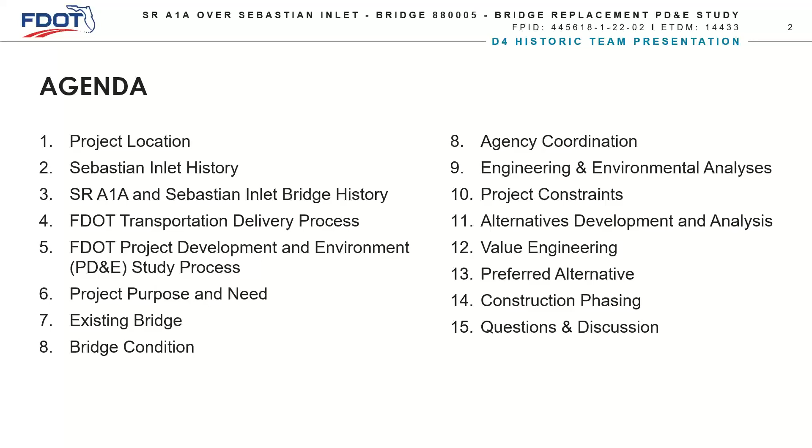Vinod covered the agenda items, so this slide just shows the agenda for today's presentation. Some of the information James and Vinod touched on, but I'll run through it anyway as part of the presentation. I'm sure some of this you already know, but as Vinod said, we're trying to cover the spectrum of the process of the project to get to where we are today.

The Sebastian Inlet Bridge, also known as the James H. Pruitt Memorial Bridge, is located at the Indian River and Brevard County boundary along State Road A1A. Part of the project is in District 4, who maintains and will be reconstructing the bridge, and it's also in District 5. So we've been coordinating with District 5 on this project as well.

The bridge crosses the inlet. It's surrounded by the Sebastian Inlet State Park to the east, or right on the map, is the Atlantic Ocean. To the west, or left, is the Indian River Lagoon.

Within the project limits, State Road A1A is a 2-lane facility with a shared use path located on the west side of the bridge, north of the bridge, shown by the green line on this location map. South of the bridge on the west side, it's a sidewalk shown by the green dash line. The blue line in between those two is the gap in bicycle and pedestrian facilities across the bridge, which does not exist at this time.

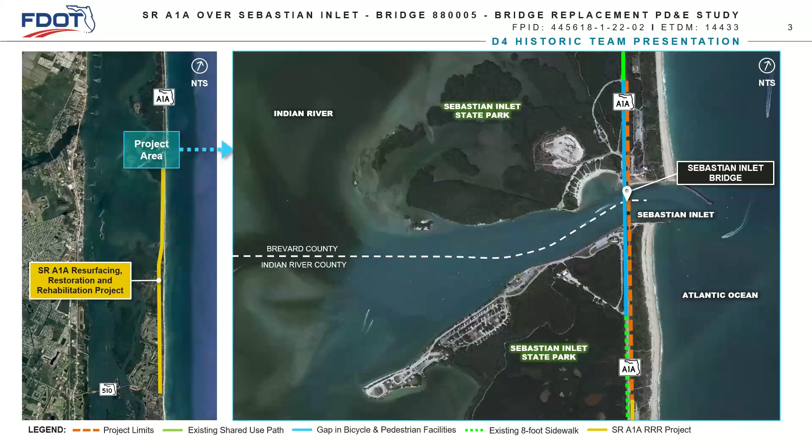So just to highlight some of the key features that surround the project: we have the bridge and the Sebastian Inlet, and the Sebastian Inlet State Park, which surrounds it on both the north and south sides. We have the Sebastian Inlet State Park Swimming Cove on the northwest quadrant, and an inlet grill and gifts facility with restrooms on the northeast quadrant. As James mentioned, there's the north and south jetties, the Sebastian Fishing Museum, the Sebastian Inlet State Park and Campground, the recreation area at Coconut Point, and a channel that goes from the Sebastian Inlet to the Intracoastal Waterway, which was coordinated with the Army Corps of Engineers and dredged by the Sebastian Inlet District, maintaining that connection between those two features. The Intracoastal Waterway is approximately 2 miles to the west of the Sebastian Inlet Bridge.

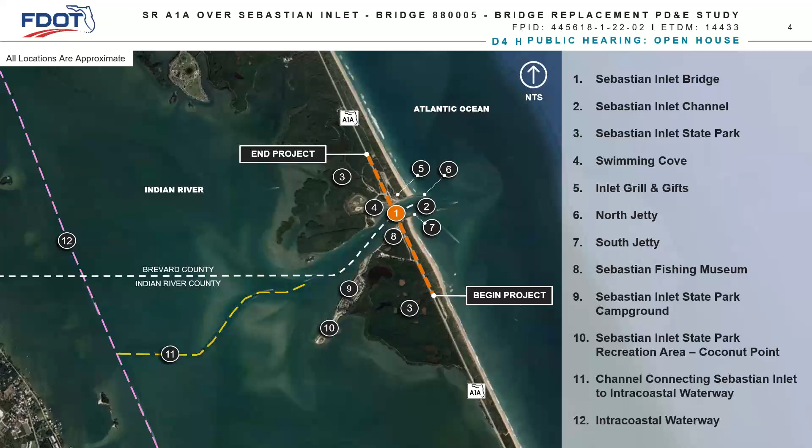The first settlers began to arrive in the Sebastian River area in the mid-1800s, and by all accounts, there were numerous attempts to cut an inlet in the barrier island located here between the Indian River Lagoon and the Atlantic Ocean. Shown on this slide, which is an 1880s geodetic survey, this area in the orange box is Gibson's Cut. D.P. Gibson was one of the first to attempt to create an inlet at this location, and it is the general location of the Sebastian Inlet today.

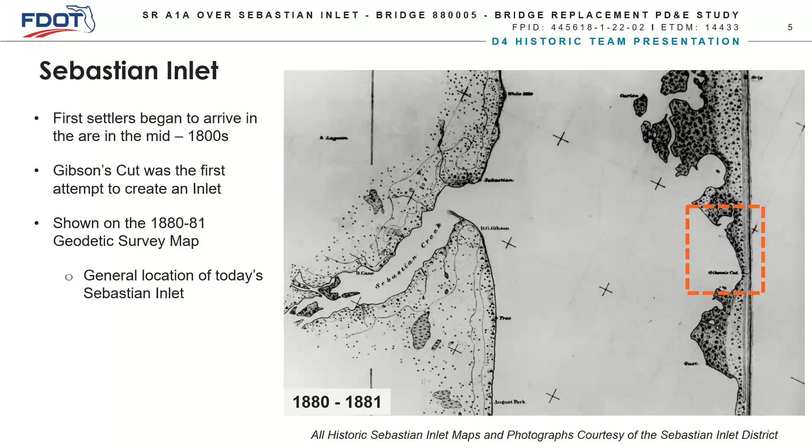At least 6 other substantiated attempts were made by 1905 to cut the inlet, and all were closed by sand, storm, or other natural causes as soon as they were opened. In 1905, Roy Couch, a figure whose name is synonymous with the Sebastian Inlet, arrived in Brevard County, and his arrival coincided with the 6th recorded attempt to open the inlet. Although it was successful, as reported in the Fort Pierce Tribune at that time, it wasn't long before the inlet was again filled with sand. As James mentioned, the Sebastian Inlet District was created in 1919 as a special taxing district to maintain navigation through the inlet. The inlet was then reopened again in 1923.

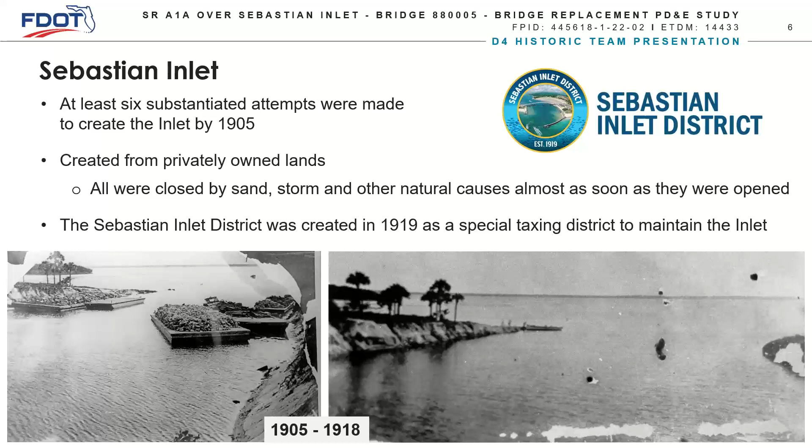In 1941, a northeaster came through the area and again closed the inlet. Because of World War II and for safety reasons, it was determined that the inlet should remain closed. Later during the war, the inlet was turned over to the U.S. Navy as an amphibious training ground for their demolition squads. You can see in these photographs the U.S. Navy training there, as well as the inlet and all the sand deposited in the shoaling area.

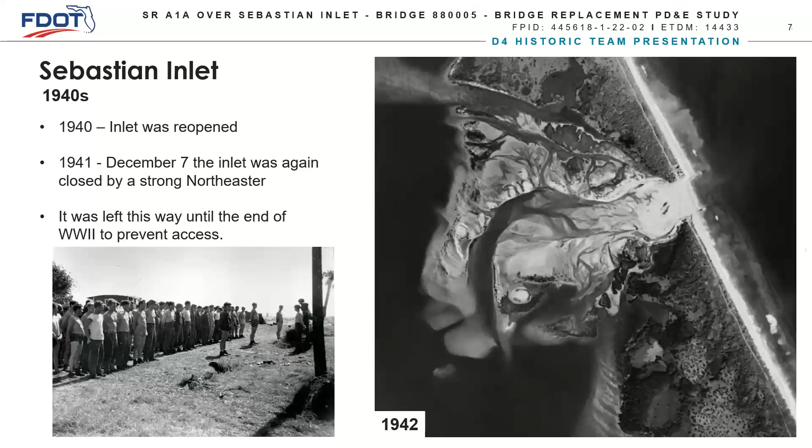So in 1944, you can see in the upper right photograph where the tower is, that's actually the center of the inlet, and it was enclosed with a 14-foot high sand dune. Then in 1948, U.S. Navy surplus demolitions were used to again open the inlet, and it has remained open ever since.

You can see there's an Army Corps of Engineers War Department bathymetric survey of the inlet, just to show some of the interesting graphic surveys that they did at that time. I just want to comment too that all of these photographs and maps were courtesy of the Sebastian Inlet District.

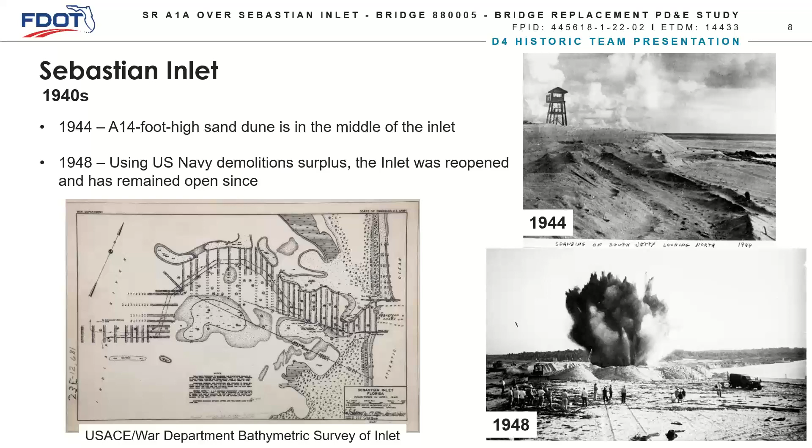And then moving on to State Road A1A itself. State Road A1A on the Brevard County side of the inlet was constructed between 1951 and 1956 by the Florida State Road Department. Then in Indian River County, the Florida State Road Department constructed the remaining portion of State Road A1A in 1961, prior to the completion of the Sebastian Inlet Bridge.

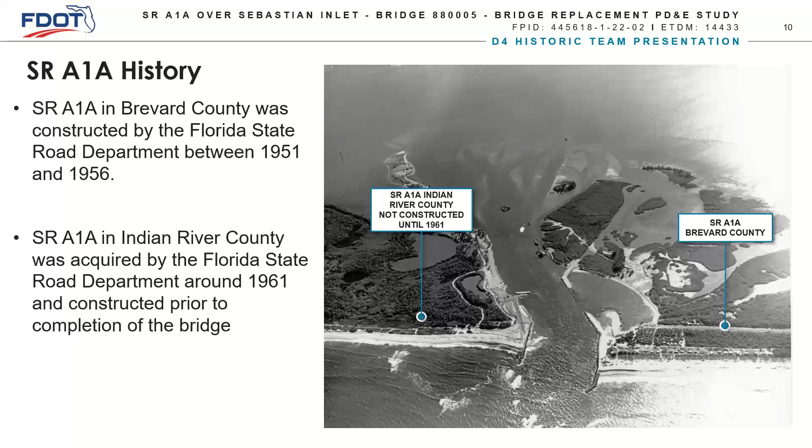The bridge, when it was completed, they specifically state that it will become part of State Road A1A for use by the general public, and that the Sebastian Inlet District shall never be obligated to pay for construction, replacement, repair, maintenance, or upkeep of the bridge.

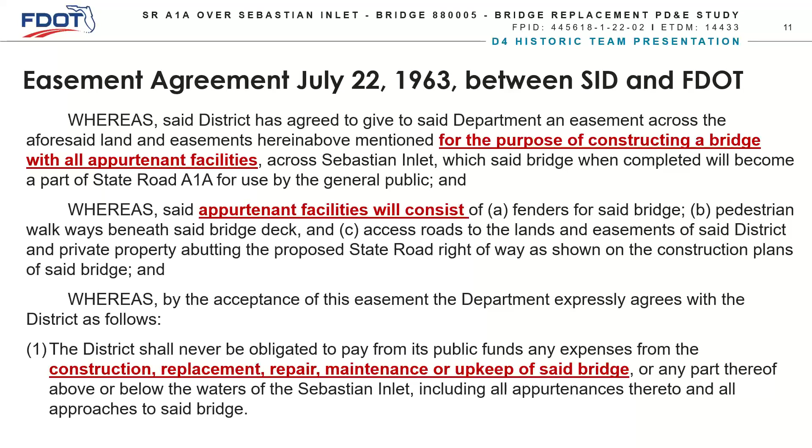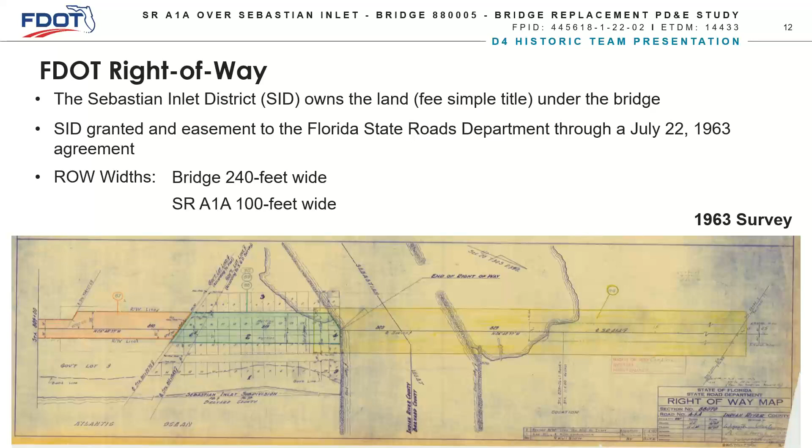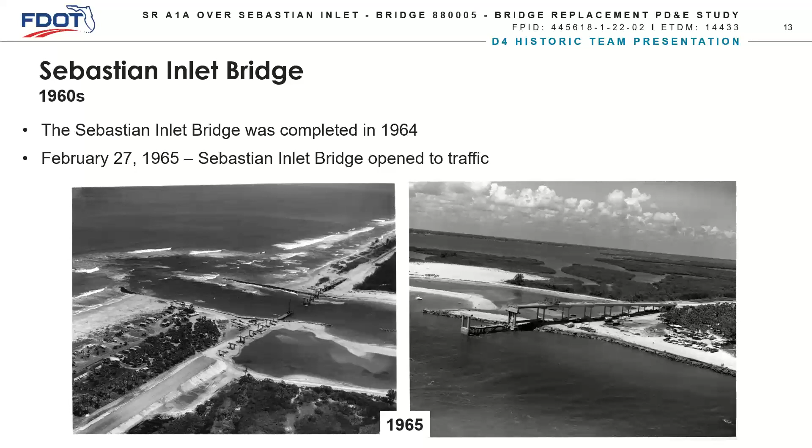So the Sebastian Inlet Bridge was completed in 1964 and dedicated in February of 1965. These photographs show on the left the bridge piers on the north side of the inlet, and then more construction of the bridge on the south side in the partially completed structure.

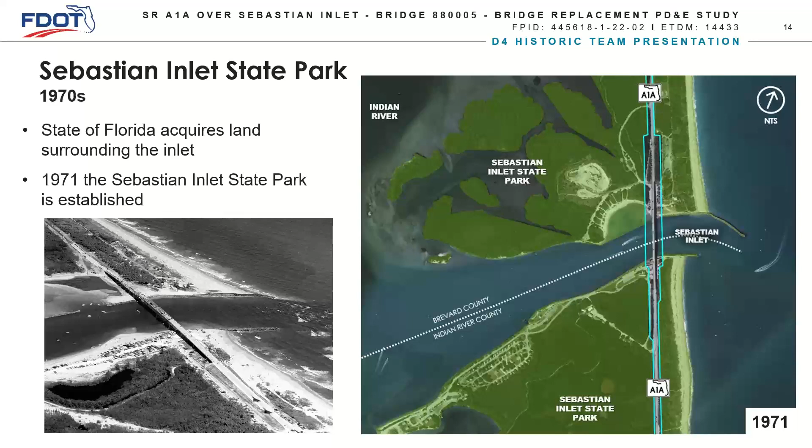So in 1971, the state of Florida began to acquire land around the inlet and establish the Sebastian Inlet State Park. Shown on the right is the state park area around the bridge location, and the park has now grown to 971 acres.

I also want to note that in 2016, the state of Florida Department of Transportation obtained NEPA assignment from the Federal Highway Administration. So essentially that grants all approving authority to the Office of Environmental Management for NEPA related decisions.

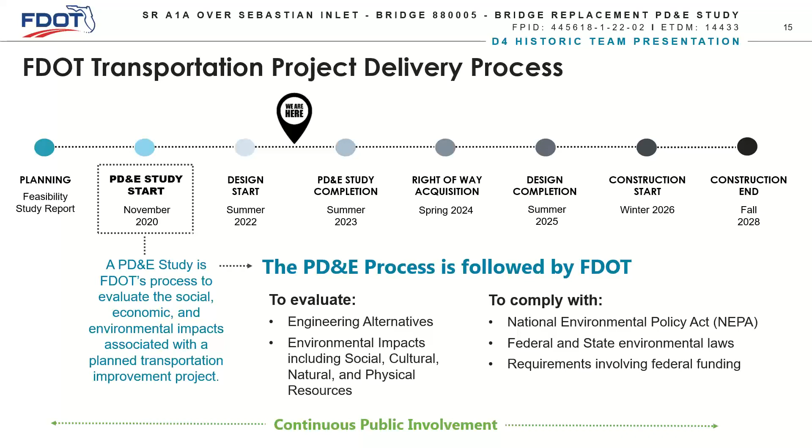So as part of the PD&E study process, it begins with data collection. The transportation issues and concerns are studied, and solutions and alternatives are developed. During the PD&E study, all environmental and engineering analyses are performed and documented regarding the proposed transportation improvement. The engineering analyses include the development of alternatives that meet the purpose and need for the project, and the environmental analysis determines what potential impacts the project might have on environmental resources.

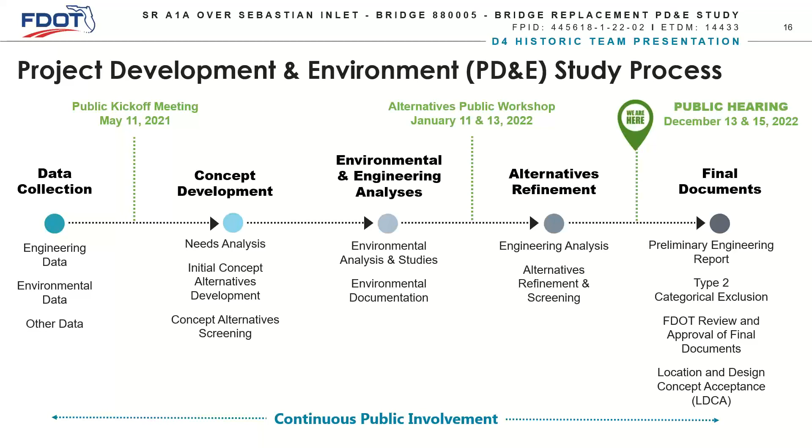These analyses all support the decision regarding the identification of a preferred alternative that moves forward into design. Public involvement is a big component of the PD&E process, and it's been ongoing throughout the PD&E study and will continue through design as well as construction.

So the purpose of this project is to address the bridge's structural and functional deficiencies, as well as address the gap in bicycle and pedestrian facilities, and evaluate alternatives. The need for the project is based on the November 2018 FDOT bridge inspection report that indicated a structural deficiency rating for the bridge and a bridge health index of 79.8.

The bridge is also functionally deficient or outdated in that it has minimal shoulders and no bicycle and pedestrian facilities.

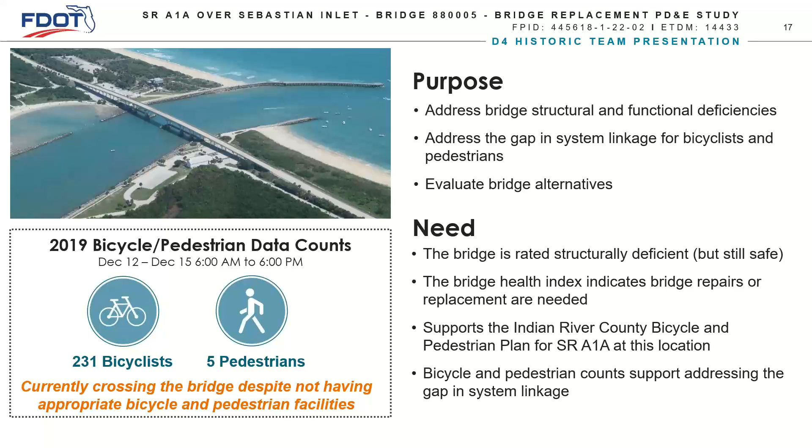The project does support the Indian River County Bicycle and Pedestrian Plan for State Road A1A. Interesting to note that as part of the feasibility study, the DOT did a bicycle and pedestrian count at the bridge over a 4-day period. 231 bicyclists crossed the bridge and 5 pedestrians. There are no bike-ped facilities across the bridge, so bicyclists actually share the road with vehicles, and some people attempt to walk across that little 2-foot shoulder. Even this past weekend, I saw someone carrying a bike walking on the little 2-foot raised curb on the bridge. So it's a much needed improvement for this project.

The existing bridge has a vertical clearance of 39 feet and a horizontal clearance of 150 feet, and the bridge roadway deck is 34 feet 3 inches. As shown in the photograph, you can see the observation and fishing piers, one located both on the north and south. A1A is a 2-lane facility with 2-foot wide shoulders and no bicycle and pedestrian facilities.

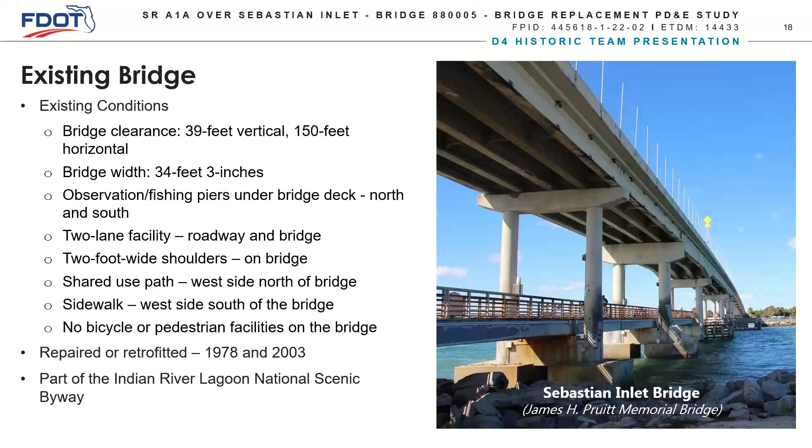The bridge has also been retrofitted or repaired in 1978 and 2003. State Road A1A is also part of the Indian River Lagoon National Scenic Byway, so the bridge is considered a historic resource.

It was originally designed as a post-tension structure. It was constructed as a pre-tension bridge, and it also features lightweight concrete. It has 19 spans, and the main span is 180 feet long, and the 3-span main unit has variable depth I-girders. These are some snippets from the original bridge plans shown here.

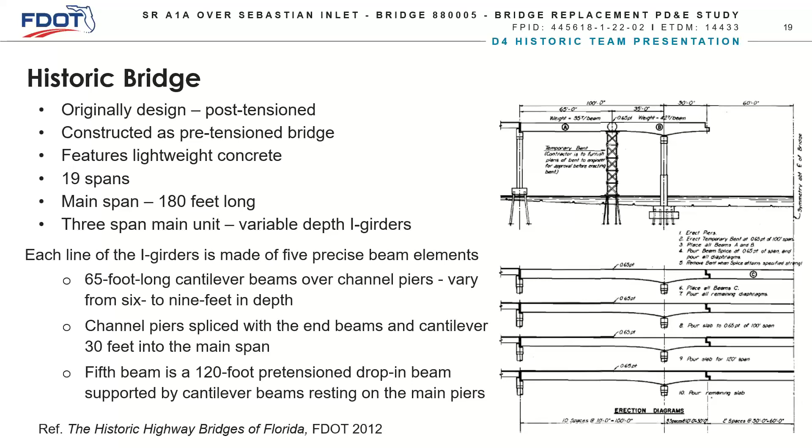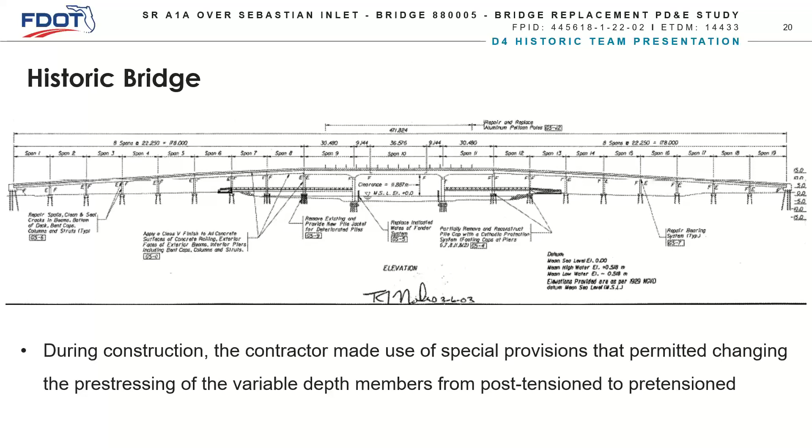During construction, the contractor made use of a special provision that permitted changing the pre-stressing of the variable depth members from the post-tension original design to pre-tension. Because of the type of bridge originally designed and then constructed, the bridge is a National Register of Historic Places resource under Criterion C, which is engineering, for its high integrity embodiment of a pre-stressed concrete bridge in Florida.

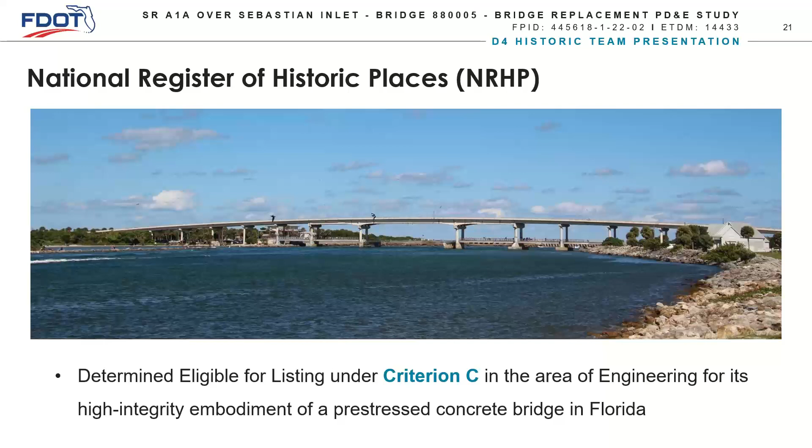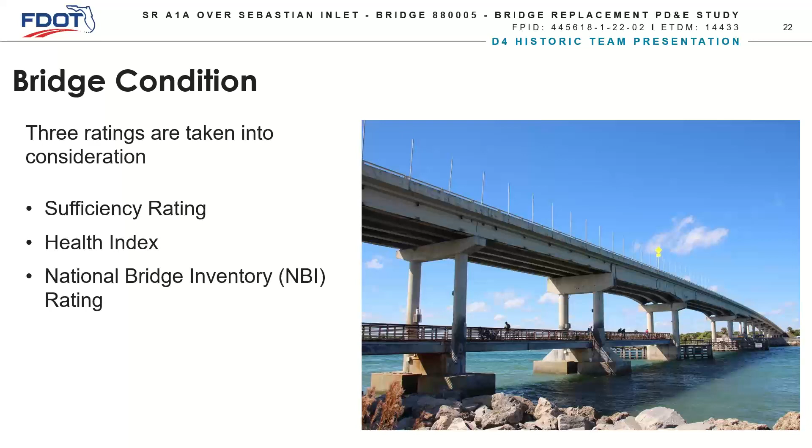As far as bridge condition, the Federal Highway Administration uses 3 ratings to determine it. The sufficiency rating evaluates factors indicating a bridge's sufficiency to remain in service, helping determine which bridges may need repair or replacement, not whether they're structurally sound. The Bridge Health Index measures 10 to 12 different elements; a lower health index means more work is required to bring the bridge to an ideal condition. A health index below 85 generally means the bridge needs some repair or replacement. The National Bridge Inventory gives ratings from 1 to 9; when any component is rated a 4, the bridge is considered structurally deficient. The November 2018 FDOT Bridge Inspection Report indicated a bridge sufficiency rating of 51.6.

The sufficiency rating serves as a prioritization tool for bridges for funding. It looks at 4 separate factors: structural adequacy and safety, serviceability and functional obsolescence, essentiality for public use, and special reductions. I want to comment on essentiality for public use for this location, because State Road A1A is the only north-south roadway here, and you'll see later that the detour is significant. The essentiality for public use here is high.

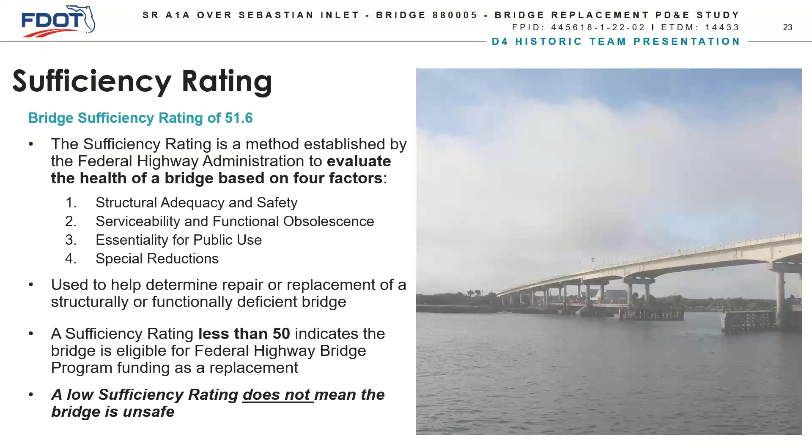A sufficiency rating less than 50 indicates the bridge is eligible for Federal Highway Bridge Program funding as a replacement. It does not mean the bridge is unsafe. The same bridge inspection report indicated a health index of 79.8, and that lower health index just means more work would be required to improve the bridge to an ideal condition. It may be more economical to replace than repair.

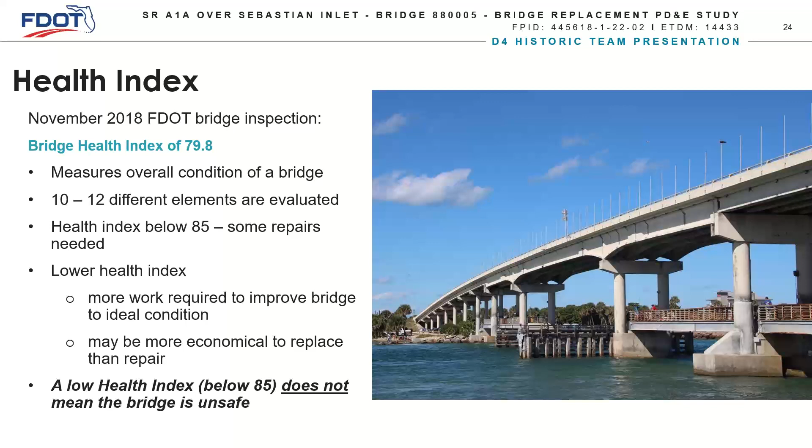The structural deficiencies identified in the bridge inspection report are based on the National Bridge Inventory Rating, which represents the primary structural components necessary to determine the overall safety of the structure. Those elements are the bridge deck, superstructure, substructure, and culvert condition if culverts are present.

A rating greater than or equal to 7 means the bridge is in good condition, 5 or 6 is fair, and less than or equal to 4 is poor condition, which gives the bridge that structurally deficient rating.

The term functionally deficient just means that the bridge does not meet current roadway design standards, such as lane width, shoulder width, and bicycle and pedestrian facilities.

FDOT's work program also requires that structurally deficient bridges, once identified, have corrective actions, which could be either repair or replacement, initiated within 6 years of that identification.

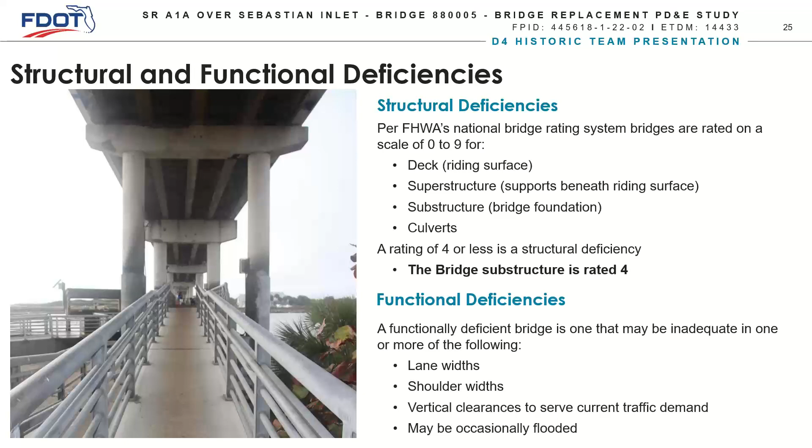So both the structurally deficient rating, the low health index, and the low sufficiency rating do not mean the bridge is unsafe, all 3 of those.

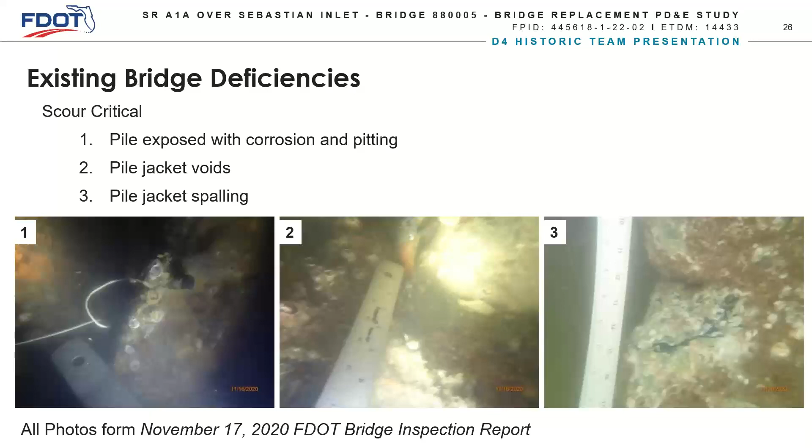These photographs were taken from the bridge inspection report to give an idea of conditions. This is below the water surface. The bridge has been identified as scour critical, and you can see exposed pile jackets, spalling, corrosion, and pitting.

There's also delamination and spalling occurring on the bridge deck, as well as on the piers, showing the exposed steel that's present.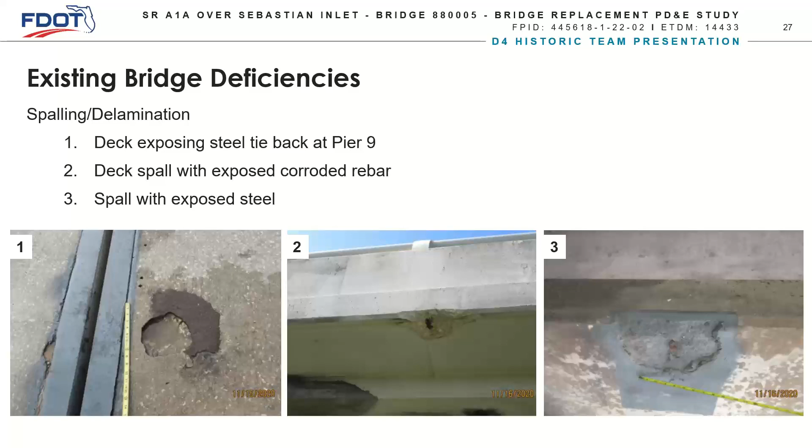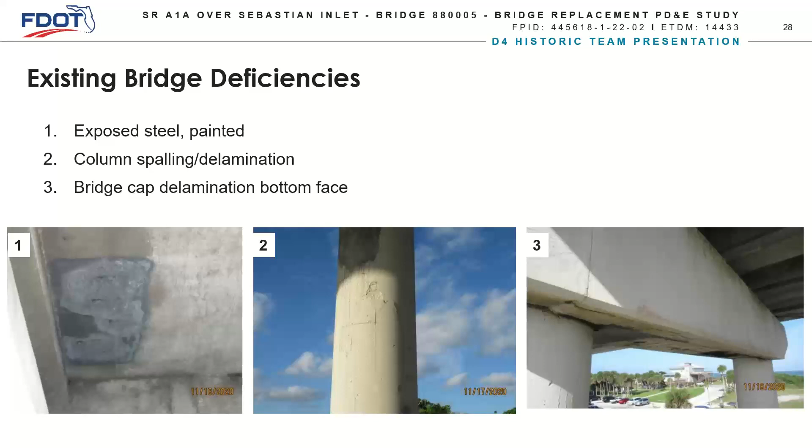Additional exposed steel, there are painted areas—that's a recurring thing where some of the concrete just drops out, so they repair that. There's also column spalling and delamination, and bridge cap delamination.

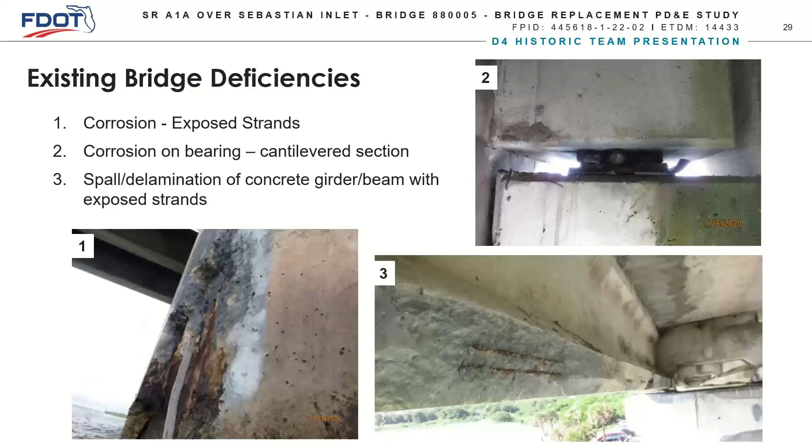These are some additional photographs showing corrosion on exposed strands, as well as on the cantilevered section, and then on the beams and girders as well.

This is a picture of the under-bridge fishing pier showing corrosion on the pier deck, as well as the railing.

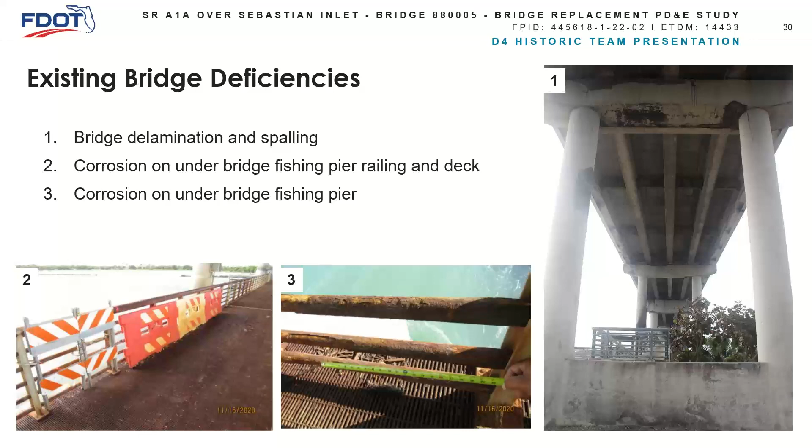Due to the location of the bridge, surrounded by the Sebastian Inlet State Park, there's been numerous agency coordination throughout the PD&E project with federal, state, and local stakeholders, as well as the general public for navigation, because it's a heavily used inlet for navigation and fishing.

This shows the timeline of U.S. Coast Guard coordination. The Coast Guard is the agency that determines vertical and horizontal clearances for bridges. Along the intracoastal waterway, the minimum vertical clearance is generally 65 feet, and the horizontal clearance is 125 feet. Keep in mind the Sebastian Inlet is not located on the Intracoastal Waterway, but 2 miles to the east of it.

During the feasibility study, a navigation study was completed—more of a visual inspection of the types of vessels using the inlet and a count of that. Then in April 2021, as part of the PD&E study, we completed a navigation survey in accordance with the U.S. Coast Guard's Navigation Impact Study Scope.

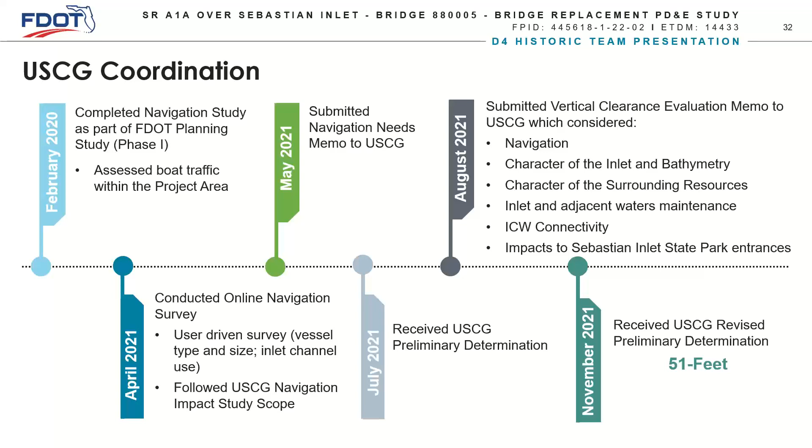This rendering shows a comparison of the existing bridge clearance at 39 feet and the proposed bridge clearance at 51 feet. The existing horizontal clearance is 150 feet, and it's planned to maintain that 150 feet horizontal clearance through the inlet. We didn't feel there was any need to reduce that width, because it takes some skill to navigate through there — the wider the inlet, the safer it is for navigating.

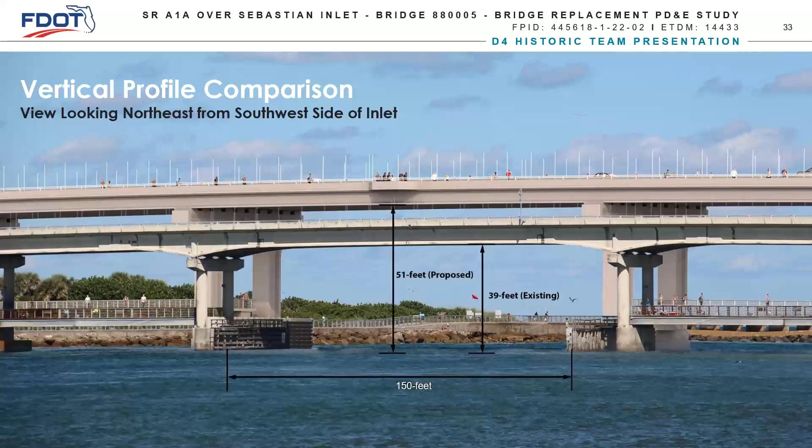This view is looking northeast from the southwest side of the inlet within the Sebastian Inlet State Park.

So for each build alternative, we looked at roadway and bridge design criteria. The design requirements included items such as bridge horizontal and vertical clearances, bridge and roadway alignment, bicycle and pedestrian facilities, maintenance of traffic during construction, safety, stormwater management, coastal influences, geotechnical characteristics, and utilities, as examples.

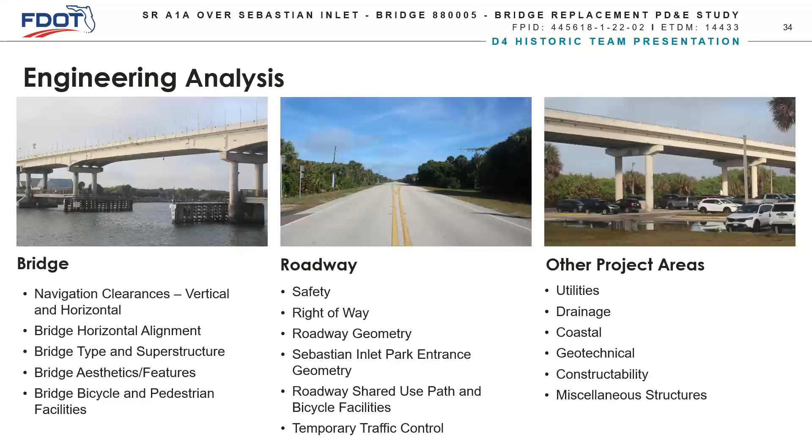The same is true for the environmental analysis for each build alternative. It was evaluated against being able to avoid or minimize impacts to these resources as we developed the alternatives, using criteria such as mobility, economy, community and recreational resources, historic and archaeological sites, wetlands, water quality and resources, wildlife and habitat, traffic noise, air quality, and contamination.

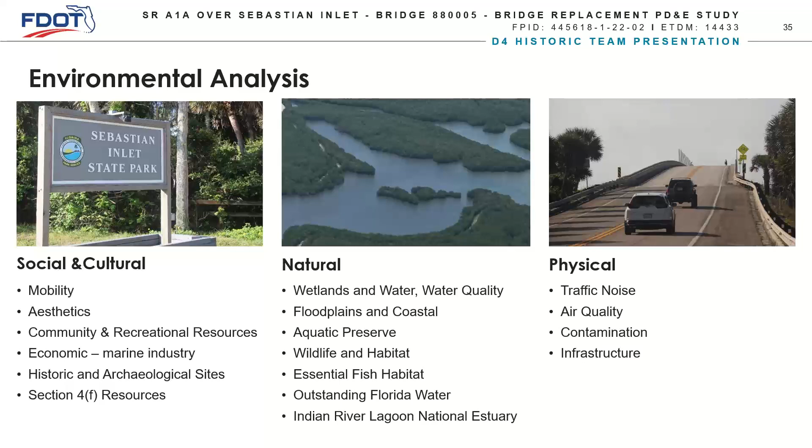Early on, prior to alternatives development, we looked at the project constraints and controlling criteria, which for this project were somewhat unique. South of the bridge, we have the existing right-of-way, which varies throughout this portion of the project area, and then we have the Sebastian Inlet and the Sebastian Inlet District fee-owned submerged lands.

We have the South Jetty access, and the Sebastian Inlet State Park dunes — these are high quality resources which really cannot be impacted at all — and the potential for beach mice habitat in this particular location. Then we have the Sebastian Inlet State Park South entrance, and the wetland areas and mangroves, which are abundant throughout the project area, especially on the west side.

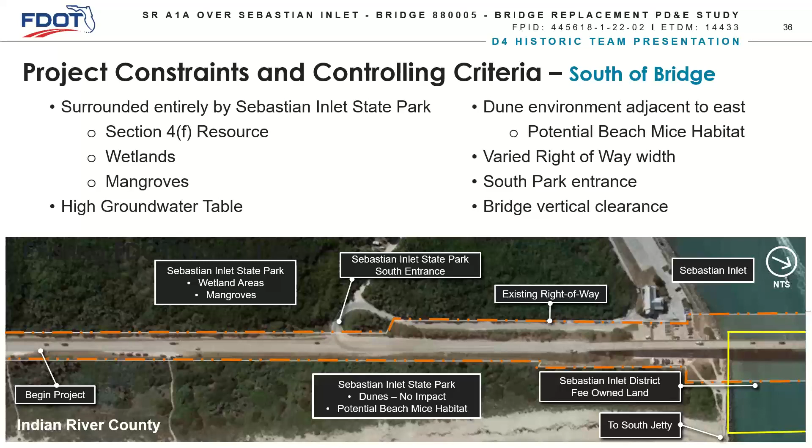We did the same for north of the bridge. We have the Sebastian Inlet State Park North entrance, the existing right-of-way, and the Sebastian Inlet State Park Swimming Cove. Again, the Sebastian Inlet District land and access to the North Jetty. We also have, on the east side, facilities for the park including restrooms, a restaurant, beach access, and utilities, and then the Sebastian Inlet District Access Road.

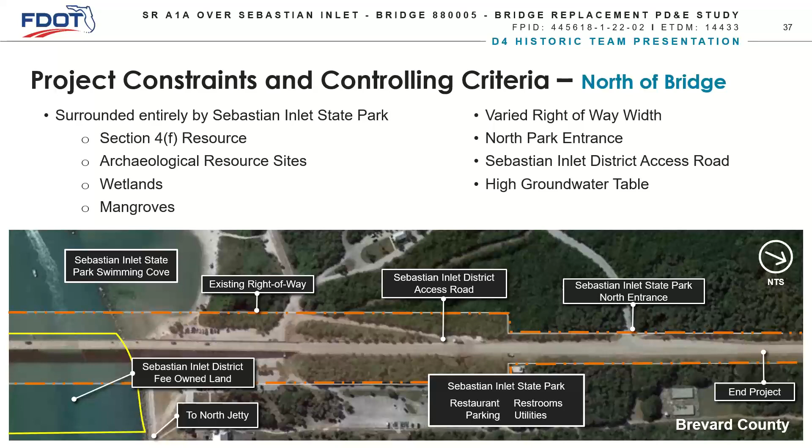That access road is what James had referred to — when they do beach renourishment, they stockpile sand in the northwest quadrant, a little to the west of the swimming cove, and they truck it down to the south side, using that access road to get onto A1A and haul it down to the south side.

Drainage solutions for older bridge replacement projects can be a significant challenge. Also note that the Indian River is an Outstanding Florida Water, which includes all the waters commingled with the mangroves adjacent to the Sebastian Inlet State Park, west of the project. The bridge discharges via scuppers to the inlet, shown in the green shaded area on this map. The bridge approach runoff is collected via inlets on both the east and west side of the road, discharging to the west, and the roadway portion discharges via sheet flow to low roadside ditches.

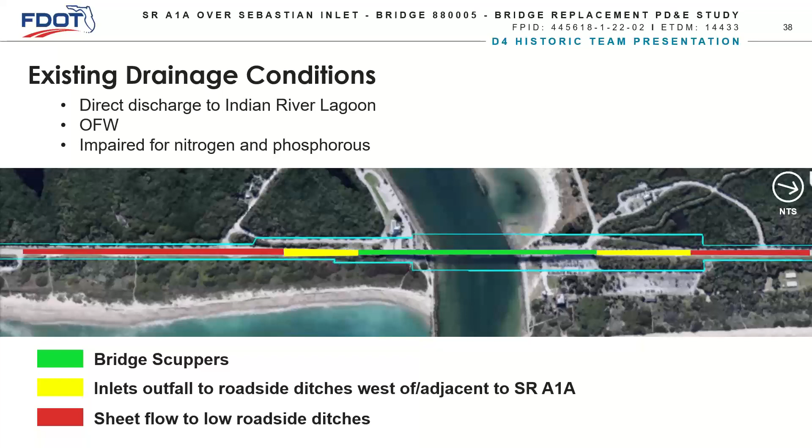Maintenance of traffic was another strong consideration for this project, because this is the only roadway location along the barrier islands here between Indian River and Brevard County. So at both the public kickoff meeting and the alternatives public workshop, the public expressed an overall common concern about maintenance of traffic during construction and potential bridge closure.

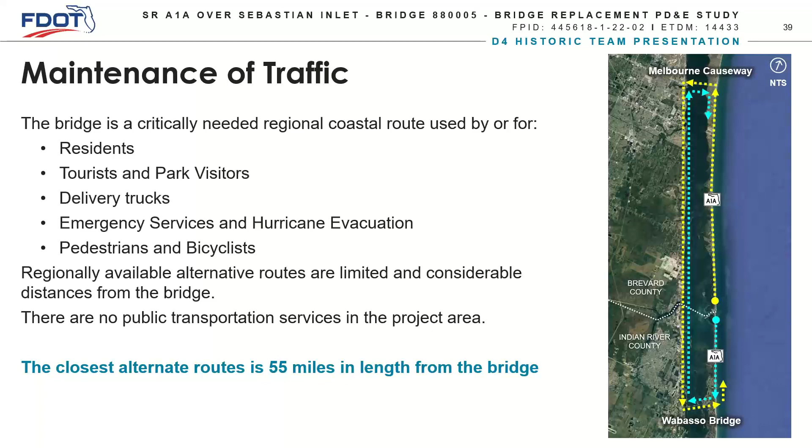Because this bridge is a critically needed route, we had to look at the detour lengths. As you can see in the graphic shown here, if you're on the north side of the bridge and want to go over to the campground on the south side, it would take 55 miles to drive to get there. That was not a viable alternative for us, so as we went into alternatives development, this was a key factor.

Again, we talked about Section 4F recreational resources, and because the preferred alternative impacts the Sebastian Inlet State Park, which is a Section 4F resource, the team completed evaluation of the impacts in accordance with the U.S. Department of Transportation Act of 1966, which established the requirement for consideration of park and recreational lands, wildlife and waterfowl refuges, and historic sites in transportation project development. The FDOT Office of Environmental Management, which now has NEPA assignment, has also been delegated the ultimate responsibility for making all decisions related to Section 4F compliance.

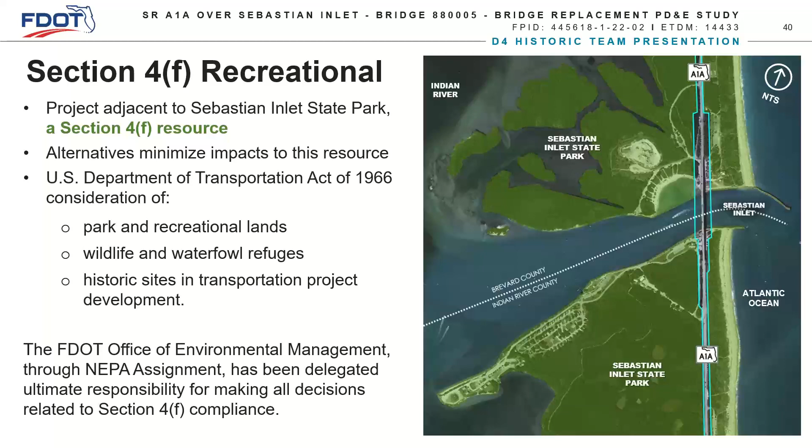And as we mentioned, the bridge is a historic eligible resource. So we have to follow Section 106 of the National Historic Preservation Act of 1966, which requires federal agencies to consider the effects of projects they carry out, approve, or fund on historic properties.

The historic resource impacts were evaluated for the no-build alternative, the rehabilitation, and the build alternatives. The no-build alternative results in no adverse effect, and the rehabilitation alternative resulted in an adverse effect. So per Section 106, we further evaluated these alternatives and determined that they failed the Section 4F feasible improvement standard, so they were dismissed from further consideration early on.

For each of the build alternatives, the condition that caused the bridge to be determined structurally and functionally deficient would be corrected, but each build alternative resulted in an adverse effect to the historic bridge. Because of that, we again applied the Section 106 criteria. We completed an effects evaluation, consulted with affected parties, and completed Section 4F documentation.

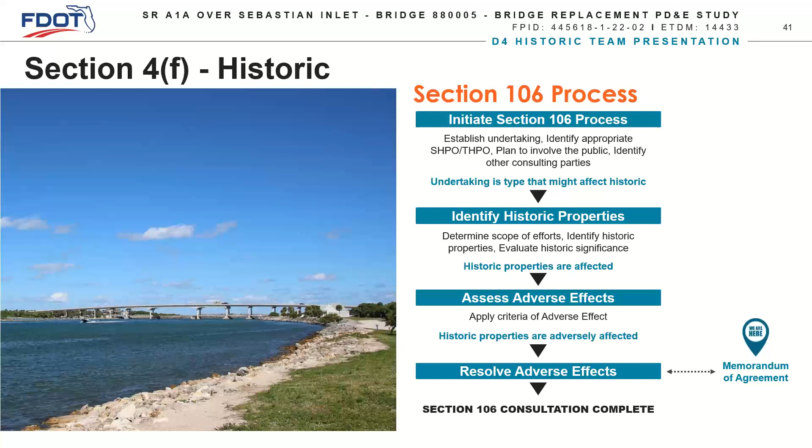In March of 2022, the State Historic Preservation Office concurred that the project was an adverse effect, and we have continued to consult with them. We're in the process of developing a memorandum of agreement to mitigate the adverse effects, and when that is signed off, the process will be completed.

Again, the alternatives considered were the no build, the rehab, and then the bridge replacement, which looked at alignments along the center and to the east and west of the existing bridge. The alternatives were developed to meet roadway and bridge design criteria with the goal of minimizing environmental impacts, and they were developed with input obtained throughout the study process from both the general public as well as federal, state, and local agencies.

The no build alternative, no improvements are made. It really serves as a baseline for comparison of the other alternatives. The rehabilitation alternative, which was also considered, was dismissed, and then the build alternatives. Following the alternatives public workshop, a value engineering study was also conducted, and the alternatives were refined, and a preferred alternative was identified, which we'll see in a little bit.

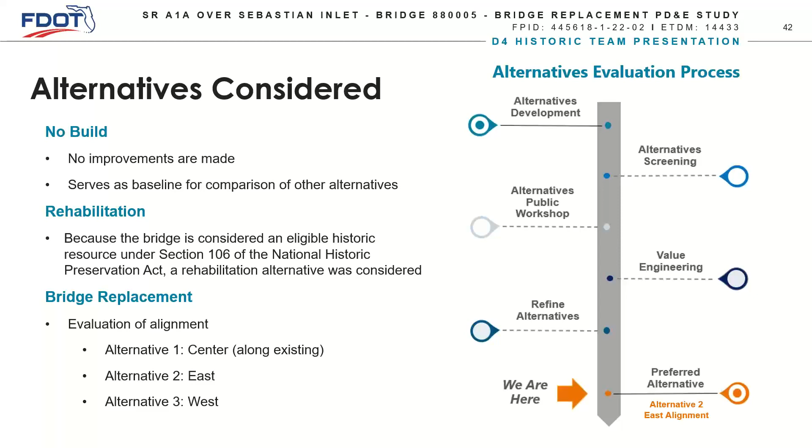So the rehabilitation alternative, whether you rehabilitate it to its existing condition or make modifications to it, doesn't bring it up to standards, and it is an adverse effect to the bridge, and it still remains structurally and functionally deficient. For some key parts, it doesn't meet current FDOT design standards, and it doesn't meet bicycle and pedestrian facilities. It doesn't provide for a 75-year service life, and it would maintain the existing horizontal and vertical clearances, and we'd have to maintain traffic during construction, which would be a challenge.

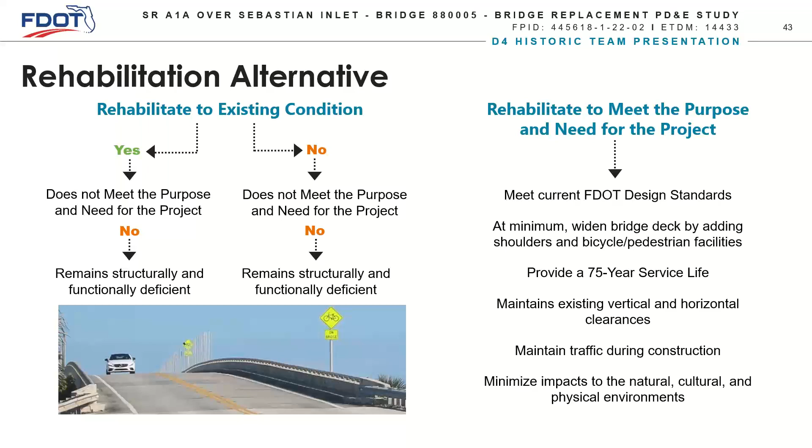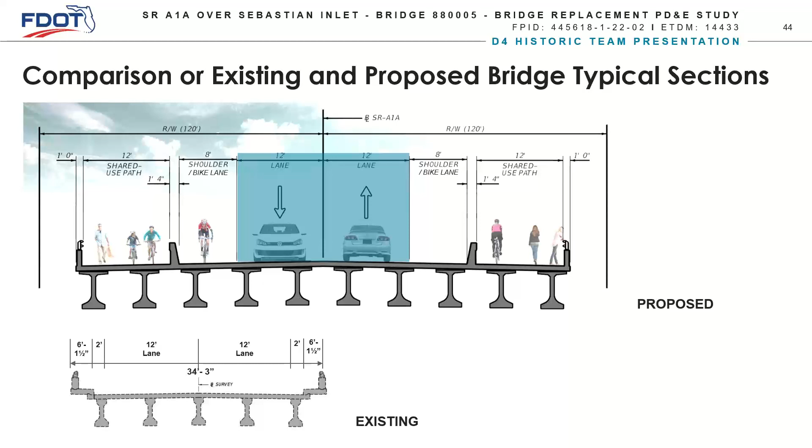This is a comparison of the existing and the proposed bridge typical sections. The proposed typical section includes two 12-foot travel lanes, two 8-foot shoulders, and two barrier separated 12-foot shared use paths, one on the east and west side of the bridge.

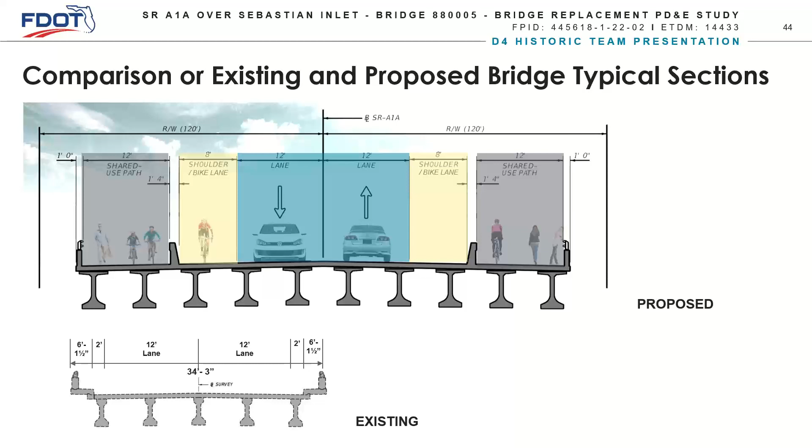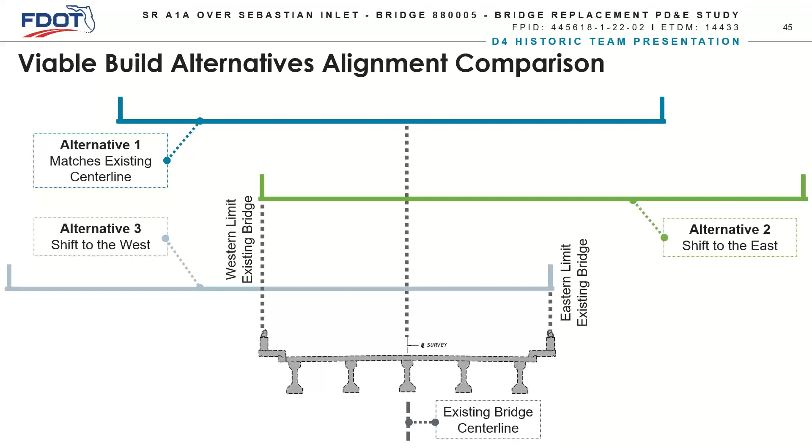So the viable build alternatives that we looked at were along the center, with a shift to the east. We generally tried to hold the western limit of the bridge for the eastern shift. And then as we went to the west, we tried to hold the eastern limit of the existing bridge as the shift. This was early on in the project, and then we moved on to further developing the alternatives.

So this was alternative 1, and it shows the bridge along the existing location of the current bridge. But this alternative would require that a temporary structure be constructed in order to maintain traffic across the bridge and to avoid that lengthy detour. All improvements for the bridge improvements are located within DOT right-of-way.

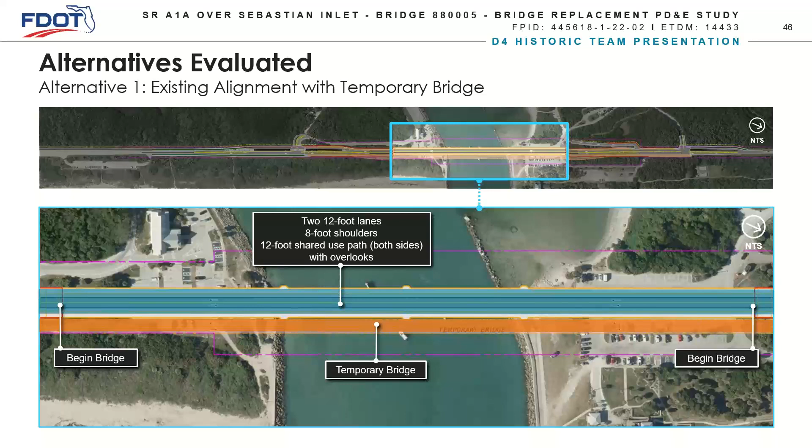Alternative 3 was the shift to the west. Again, all improvements are located within FDOT right-of-way. The blue shaded area is the existing structure shown on the east.

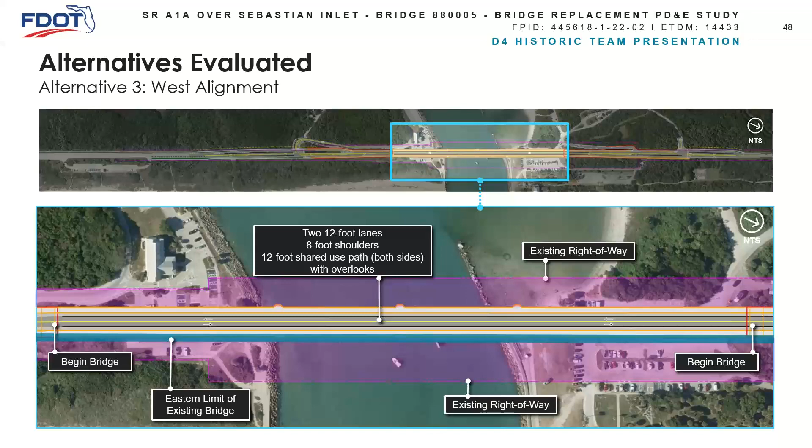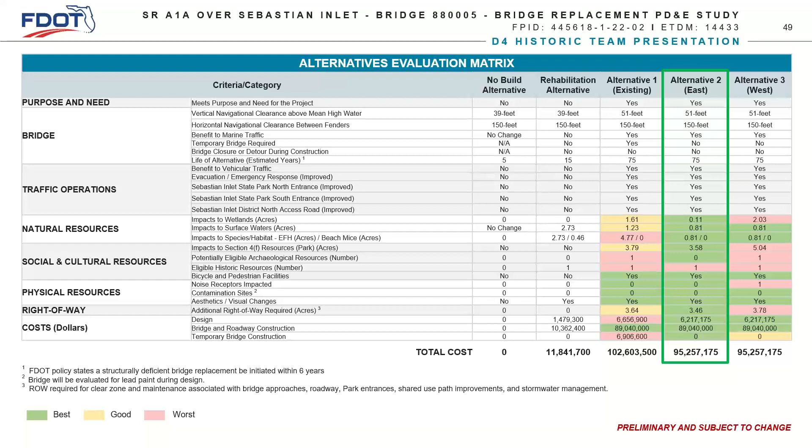For this project, the NEPA document is a type 2 categorical exclusion, and a preliminary engineering report was also prepared for the document. The evaluation matrix results, both for the alternatives public workshop and the public hearing, showed that alternative 2 was the preferred alternative for this project.

A value engineering study was then conducted by the department in May of 2022. From this week-long study, 6 value engineering recommendations were made, of which 3 were accepted, and 11 additional design recommendations were made, of which 3 were accepted.

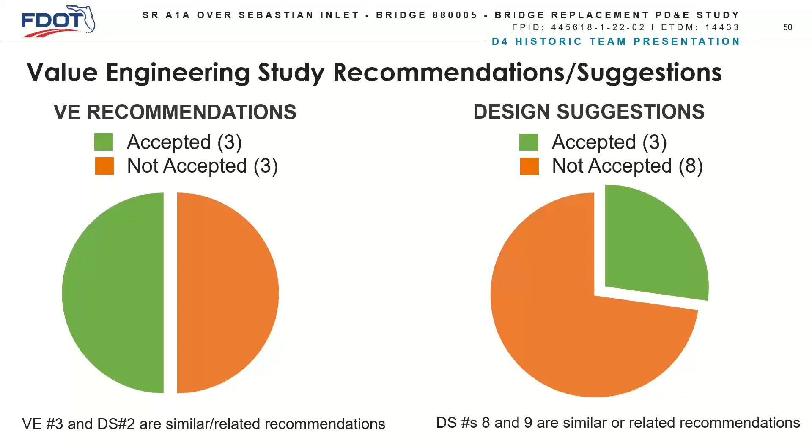Most significant from the recommendations was a shift farther east in the alignment as it crosses the inlet. The recommendation was made to shift the proposed foundations as far away as possible from the existing foundations in order to avoid impacts to the existing bridge during construction. This shift was made without increasing any environmental impacts, and the realigned alternative was presented at the public hearing in December of 2022.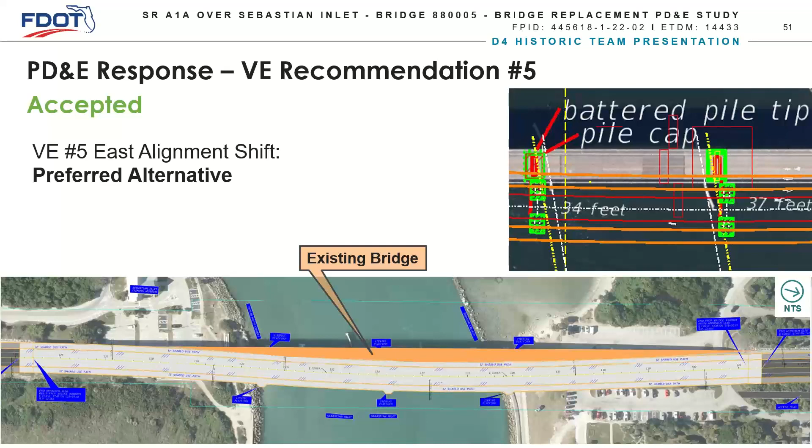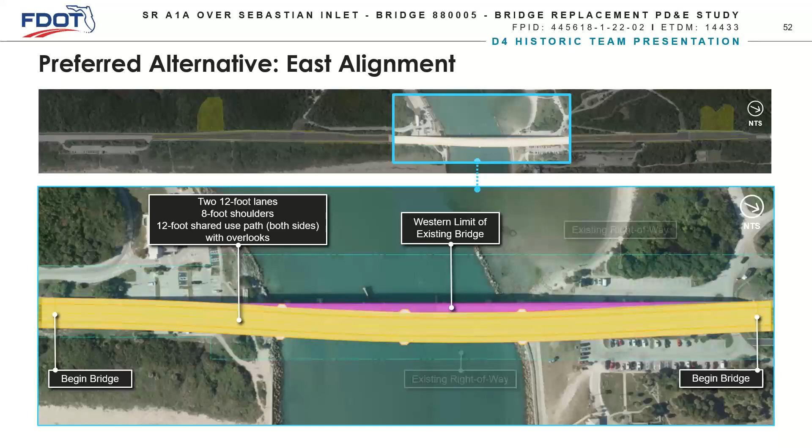Moving into the preferred alternative, you can see the shift is a little bit farther to the east of the bridge. Again, all of the bridge improvements are located within existing FDOT right-of-way.

To the south, the improvements include reconfiguration of the Sebastian Inlet State Park entrance road, a right turn lane out, and an added acceleration lane southbound. On the south side of the park is the campground and a boat ramp, so there's a lot of vehicles and trucks towing campers or trailering boats. This provides some additional safety, although traffic didn't necessarily warrant it from a safety perspective. It gave them time to make the turn out of the park and get some speed up to get into the travel lane.

We also lengthened the right turn lane into the park entrance in order to avoid some spillback onto State Road A1A. We added the shared use path, continued that, and tied it into the existing sidewalk. We have the shared use path on the bridge at 12 feet, with a proposed crosswalk at the park entrance. What you don't see here is that we actually extended this shared use path on the east side farther south, where there's a day use area and parking area for the park. That reduces to 8 feet wide, but it provides some pedestrian safety for people who want to get to the bridge or the park.

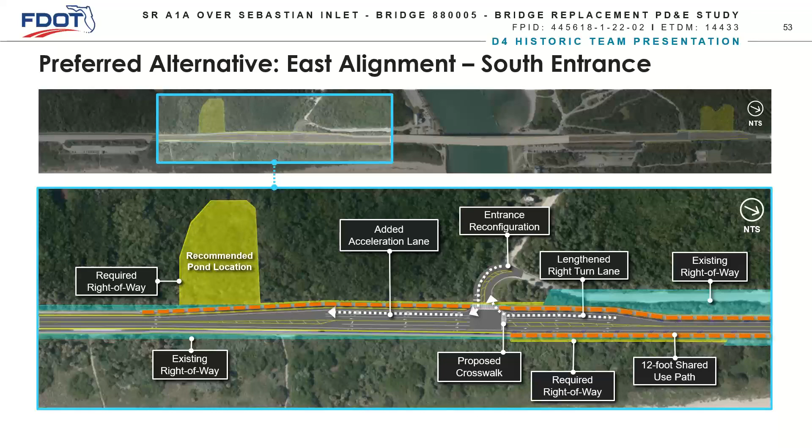This yellow shaded area you can see is the recommended pond location. For stormwater management, that becomes part of our Section 4(f) impacts, as well as some minor right-of-way required for clear zone and maintenance along State Road A1A.

On the north side, again we have the existing right-of-way. We have the north park entrance reconfiguration, again adding a right turn lane out, and we lengthen the right turn lane into the park. This is the main entrance to the swimming cove and the restaurant, where a lot of people who aren't necessarily camping or going to the boat launch access this area, as well as access to the north jetty.

Again, we connect the shared use path on the west side of the bridge as well as on the east side, and provide a crosswalk at the park entrance. We also relocated the Sebastian Inlet District access road to the east side. This was determined during part of the VE study, and it really helped reduce impacts—almost an acre of mangrove and wetland impacts were eliminated by the shift to the east side. We also have the recommended pond location on the north side, again part of the Section 4(f) impacts.

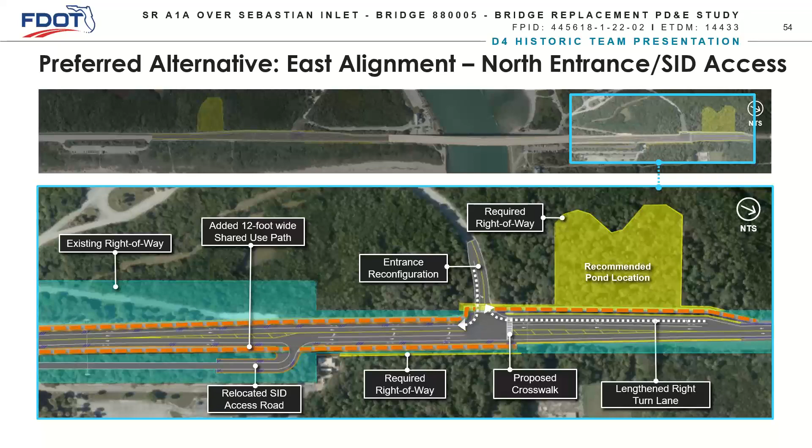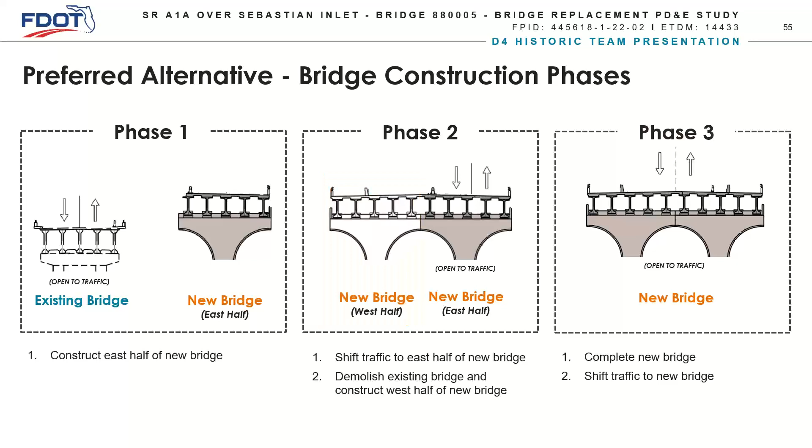This was done in order to maintain traffic across the bridge and avoid a lengthy detour. This is what the proposed bridge construction phasing looks like: the existing bridge will remain in service while the east half of the new bridge is constructed. Once that is completed, traffic will shift to the east half of the new bridge, and then the west half of the bridge will be constructed. Then we'll have phase three, where the bridge is open.

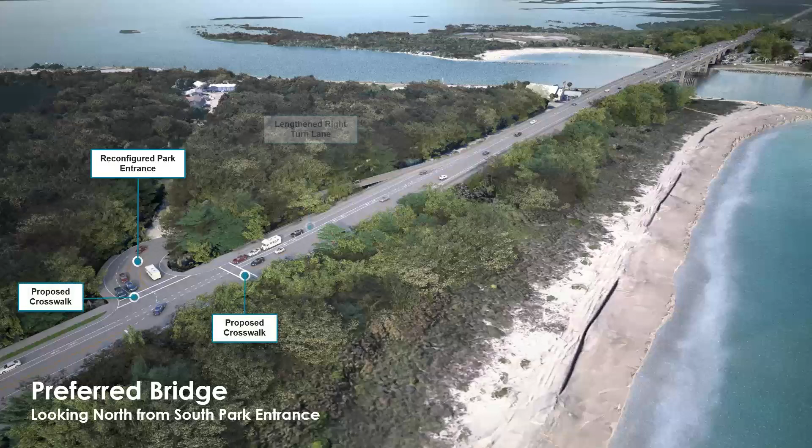So this is a rendering of what the preferred alternative looks like looking north from the South Park entrance. We have the reconfigured park entrance, the proposed crosswalks, the lengthened right turn lane into the park, and the 12-foot shared use path on the east and west sides.

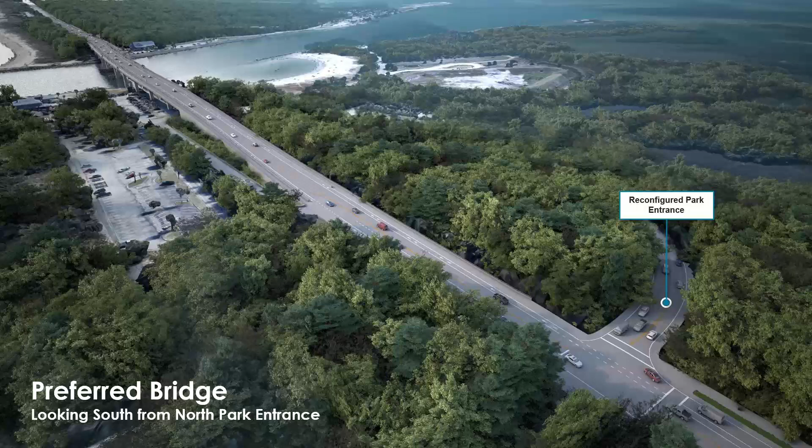And then looking south from the North Park entrance, we have the reconfigured park entrance, the proposed crosswalks, the lengthened right turn lane into the park, the 12-foot shared use path on the east and west sides, and the relocated Sebastian Inlet District access road.

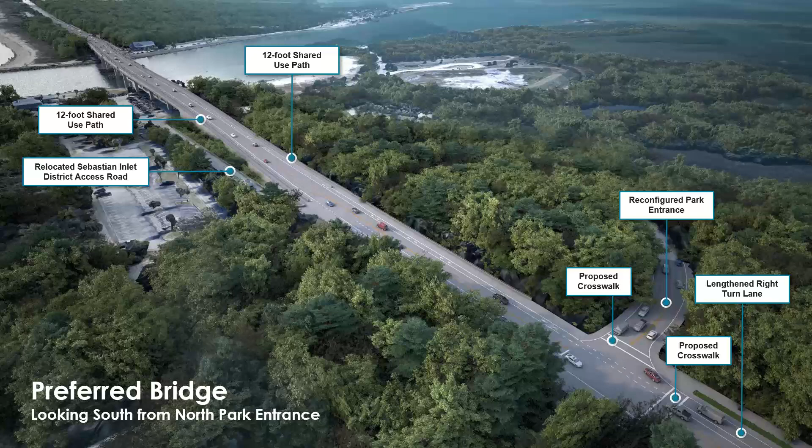And then this is a rendering of what the bridge would look like based on the preferred alternative developed in the PD&E study. So you can see the 8-foot shoulders, the barrier separated shared use path, and the two 12-foot travel lanes as well.

There are bridge lookouts proposed, three on each side of the bridge, more for accommodating people to take in the views. Currently they walk up to the top of the bridge and stand in the lane or in that little shoulder area or on the curb. So this provides some safety for that and enjoyment, as well as if people are walking up over the bridge and need to take a break, they can move out of the shared use path and take a break from hiking up over the bridge.

And then we have the observation piers that are under the bridge that will also be replaced, as well as the bridge fenders that will be replaced.

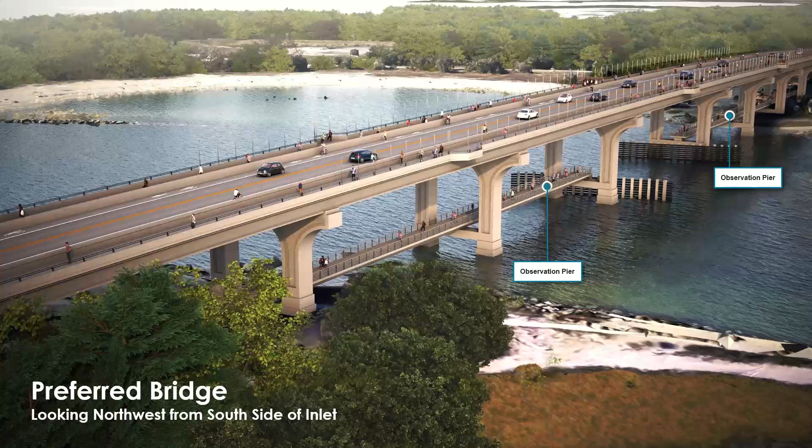And I want to thank you for allowing the opportunity to present to you on this project. It's been a really challenging project, but very enjoyable to work on. All right, thank you.